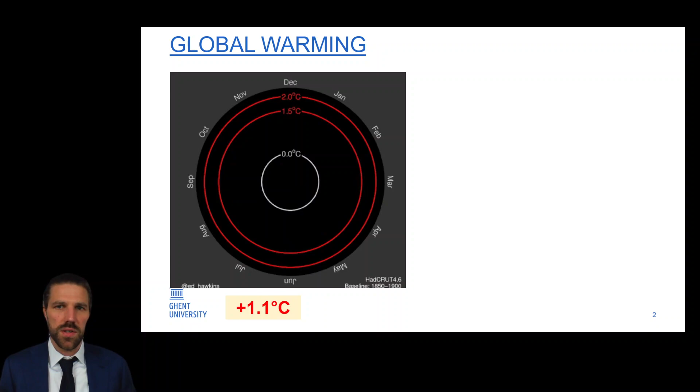This has huge implications for us. Glaciers on land and in the Arctic are melting and disappearing, and that is causing sea levels to rise. If we are not careful, it will rise by more than 1 meter by the end of the century. That could cause problems since about 40% of the world's population lives in coastal areas. In Belgium in particular, we may have more frequent extreme weather, such as the floods in Wallonia a few years back and the Ciarán storm a few weeks ago.

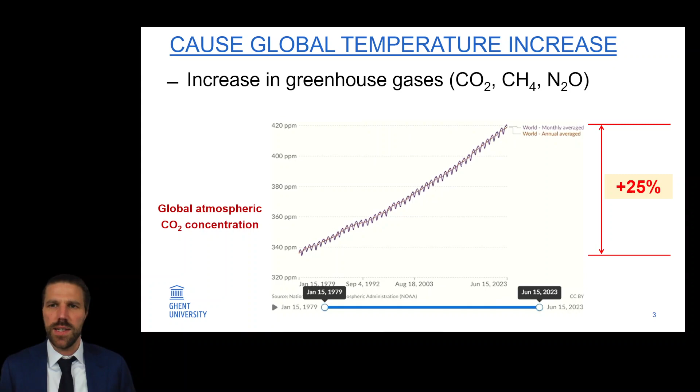The reason for the rise in temperature is greenhouse gases. On this graph you can see the rise of CO2 in our atmosphere, and it has increased by 25% in the past 40 years.

CO2 accounts for 74% of greenhouse gases, methane for a good 17%, and nitrous oxides for 6%. And then we have 2% for the so-called F-gases used in, amongst others, fire extinguishers and refrigerators. The nitrous oxides are mainly released as a result of fertilization, and methane from our livestock, landfills, or in the production and use of natural gas.

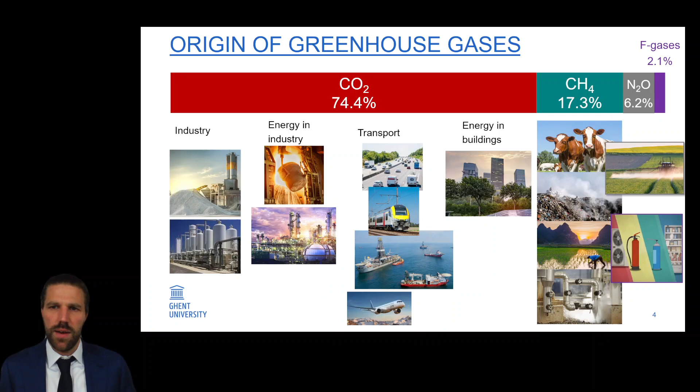CO2 is mainly released from our industry in power generation and in transport. In my doctoral research, I focused on the marine industry, and this accounts for 2 to 3% of global greenhouse gas emissions.

One question we can ask is whether regulations are needed to bring down those greenhouse gases. Currently, we emit about 50 gigatons of CO2 equivalent annually. If we continue business as usual, this will continue to rise, and by the end of the century we will have global warming of between 4 and 5 degrees Celsius.

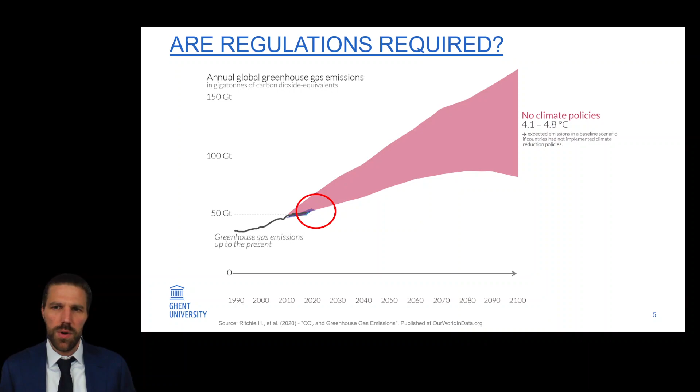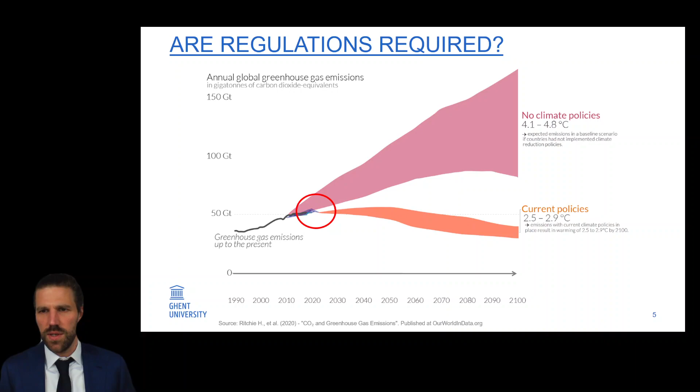Europe wants to be climate neutral by 2050, and they do that by implementing various regulations. In shipping, Europe's goal is to reduce CO2 emissions by 6% by 2030 and 80% by 2050.

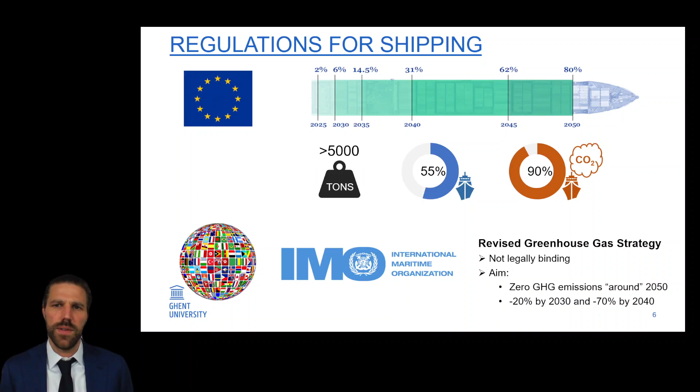That applies to ships weighing more than 5,000 tons and operating in European waters, and that's about 55% of all ships in European waters, accounting for about 90% of the ship's emissions in Europe. In international waters, the rules of the International Maritime Organization apply, and it recently updated its greenhouse gas strategy, aiming to be climate neutral by 2050, but for now it is not yet legally binding.

Now the question is, how can we implement those regulations? What technologies do we have available for that? Here it is important to note that there are two markets for those technologies: on the one hand, you have new ships being built, but on the other hand, there's also a market for retrofitting existing ships, and that's because the lifespan of ships is more than 20 years.

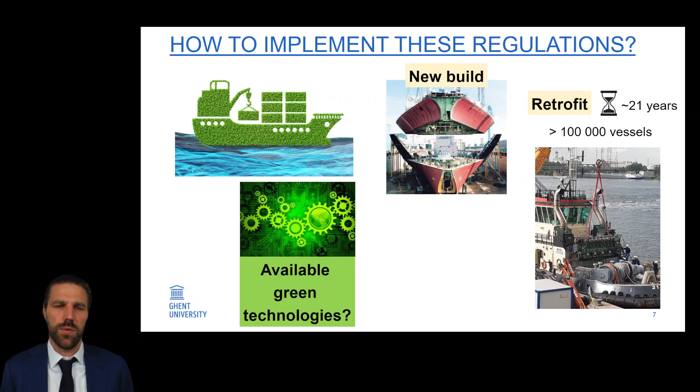Before we can look for solutions, the question is: how are ships powered today? That is mainly with petroleum products and internal combustion engines. More than 95% of ships are powered this way. Those petroleum products are typically heavy fuel oils, marine gas oil, and marine diesel oil. We want to get rid of this combustion of products.

And then when we start looking at alternatives, we need criteria to evaluate them. As a set of criteria, we can use the following: first and foremost, it is important that our solution is sustainable.

And that means that we use a sustainable source such as wind or solar energy. Second, it is important that we have a scalable solution. Recall from the previous slide that we don't have one ship, but more than 100,000 ships. If we have a scalable solution, then that also means affordable. The last criteria we have is the compactness of the solution. It has to be compact enough, as we will see later.

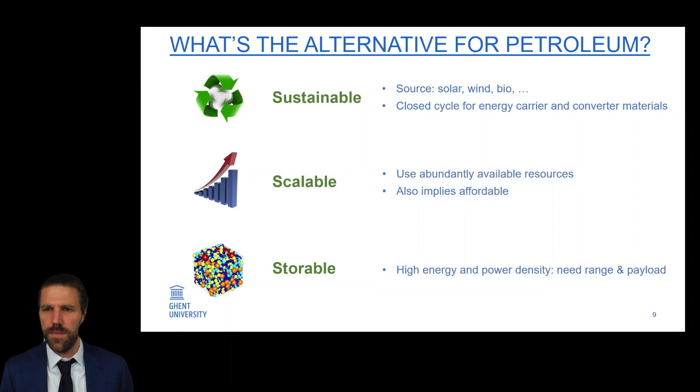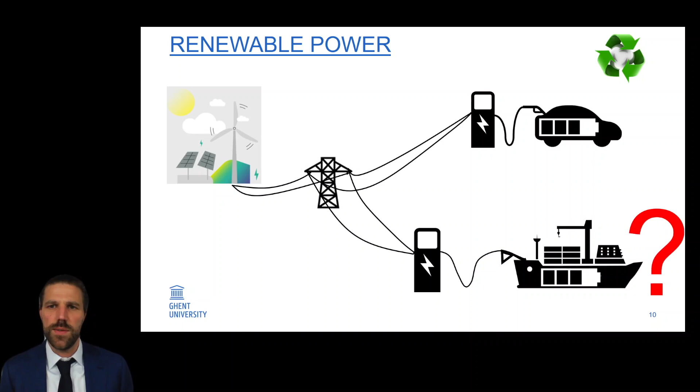If we want to use a renewable energy source, that means we want to use wind or solar, for example. And then the first question is whether we can start using ships analogously like electric cars—installing a battery electric solution in ships that we would charge directly by the grid. Whether this is feasible is best demonstrated by the next slide.

This figure shows a patrol ship weighing around 4,000 tons and about 18 megawatts of power provided by engines. If we look at the volume occupied by the diesel tanks in the ship, we see that the diesel occupies this gray volume. Now, should we want to store the same amount of energy on the ship with batteries, we need this red volume. This is obviously not feasible, and we could also question whether the ship would remain stable. So batteries are not an option, except for very short distances.

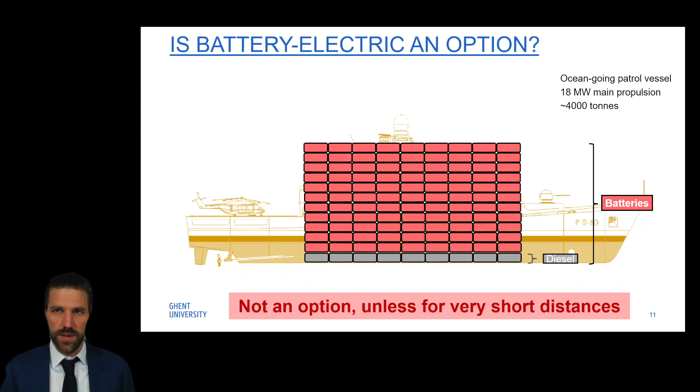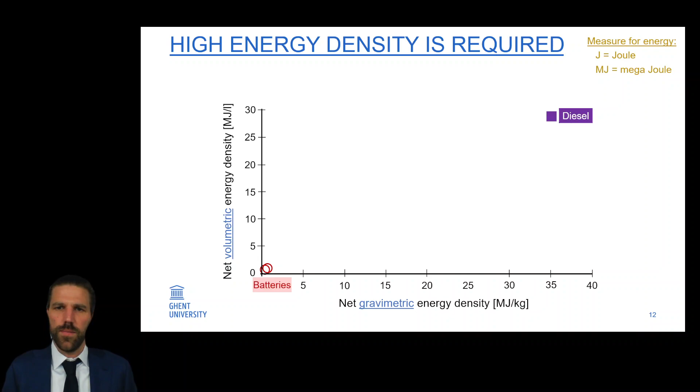Now, how come we can't use batteries? We can see that most easily on this graph. It shows on the x-axis the energy density per kilogram and on the y-axis the energy density per liter. If we put diesel here on this graph, we see that we are on the far right - diesel has a fantastic energy density. For batteries, on the other hand, we are on the far left at the bottom - batteries have a very low energy density. So for ships, we have to look at a different solution than electric, and this is why shipping is catalogued as hard to electrify.

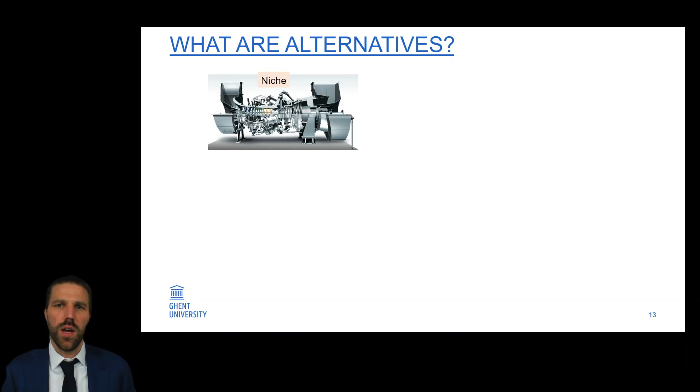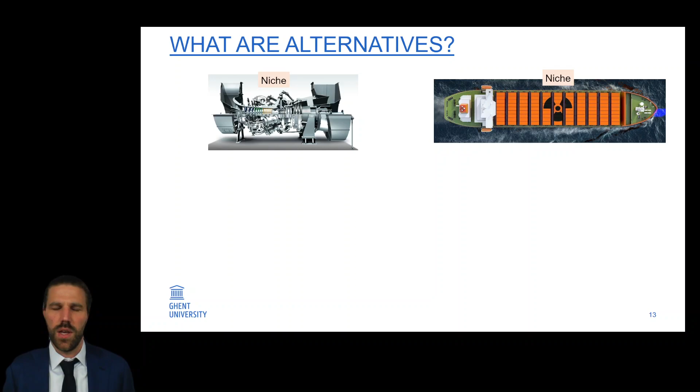But then, if we can't use battery electric, what can we use? There are 4 technologies that emerge. The first is the gas turbine - an interesting energy converter, but it has a number of drawbacks and is therefore not established in shipping, only for some niche applications. The second is using nuclear power, but nuclear power on ships is controversial and is therefore only interesting in niches such as submarines. Third, we have back our internal combustion engine, but used in a different way.

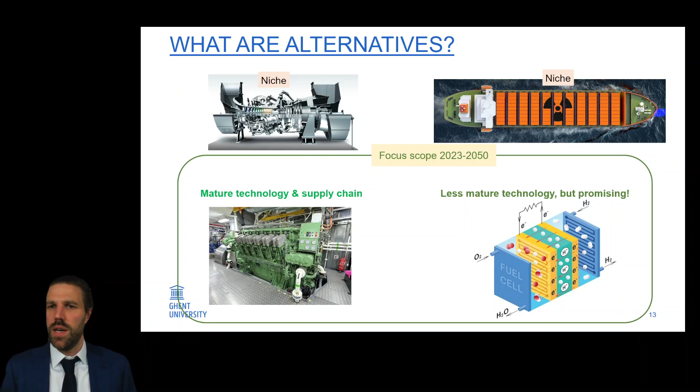This is a very mature technology that has proven itself for many years, and also its supply chain is fully established. And then we also have the fuel cell. Fuel cell technology is a very promising technology, but its maturity is yet to fully build up, as is the supply chain. The latter two have the focus for making shipping sustainable. Both technologies will play an important role, but given the maturity of the internal combustion engine, it will play a very important role in making shipping sustainable. It is also this technology that I investigated in my PhD research.

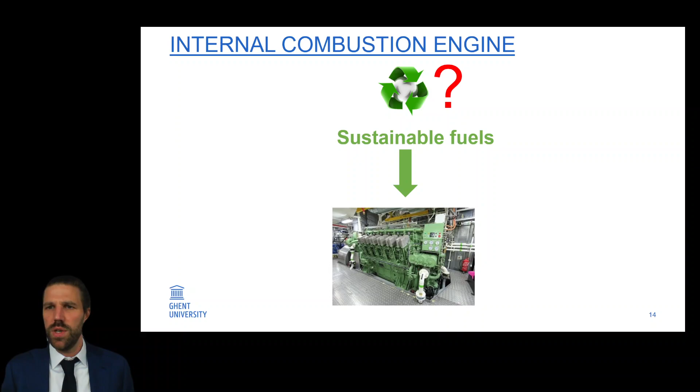But then the question is, is this technology sustainable? Because a few slides ago I mentioned that this technology, together with petroleum products, is responsible for more than 95% of CO2 emissions in shipping. And to that, the answer is yes, provided that we use sustainable fuels. So we say, keep the internal combustion engine, change the fuel. And that reasoning is similar to today's electric cars, because we also say that if it runs on electricity from coal-fired power plants, it makes no sense.

The question is now how to produce sustainable fuels. Recall from a few slides back that we could not use batteries on ships as we can with cars. But actually we want to use the same source, wind and solar power, because these are our renewable energy sources. Now we have the ability to convert this electricity into hydrogen through electrolysis. Very briefly, this is the process where we put two electrodes into water, one positive and one negative. Water, which has the chemical formula H2O, then splits into hydrogen and oxygen. And that hydrogen now contains all the energy from the wind or the sun, subject to certain conversion losses.

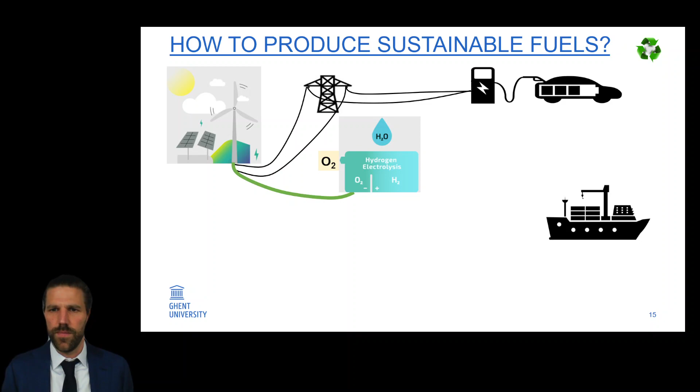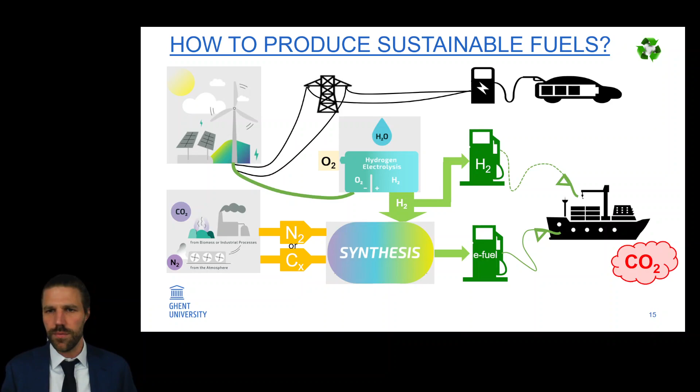We can now start using that hydrogen directly for fueling, or we can feed that hydrogen to a synthesis process. If we also add to that synthesis process carbon or nitrogen taken from the air, from flue gases or biomass, we can make any fuel we want. As a result, we then have so-called e-fuels, where the E stands for electro, because the electricity comes from wind or solar energy. And with that hydrogen or e-fuel, we can now refuel our ship. When we burn e-fuels, which contain carbon, we do release CO2, but we have first captured that CO2, so we get a closed CO2 cycle, which is not bad for our climate.

This way, we can distinguish two strategies to make the transport sector sustainable. The first is via direct electrification - we directly electrify our application, such as cars, and we directly charge them. And the second is the indirect electrification strategy, so in this, we are first going to convert the sustainable electricity into a fuel that we can then use in our application, such as ships that are difficult to electrify.

But then the question is, which renewable fuels? And then we have to start with hydrogen, because that's the first product we make from renewable energy by electrolysis. And hydrogen is a very good fuel for engines and for fuel cells. But hydrogen has a disadvantage of having a low energy density.

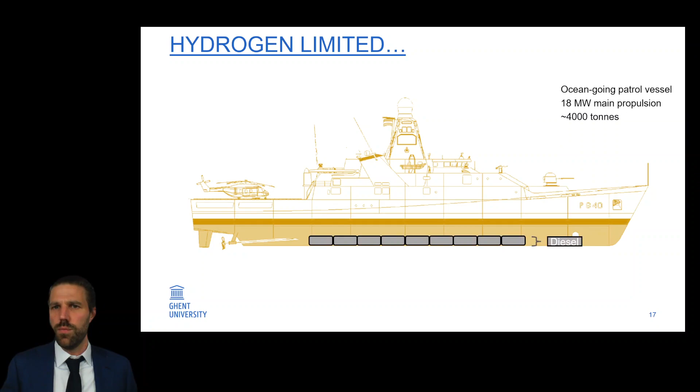If we apply this to our patrol boat from earlier, we would need this amount of tank volume with diesel, as we saw, and we should add this amount of volume to have the same energy on board with hydrogen.

So hydrogen will not be able to be used for long distances and high power, but only for small distances, as for example in this tugboat from the port of Antwerp with engines from ABC that sponsored my PhD.

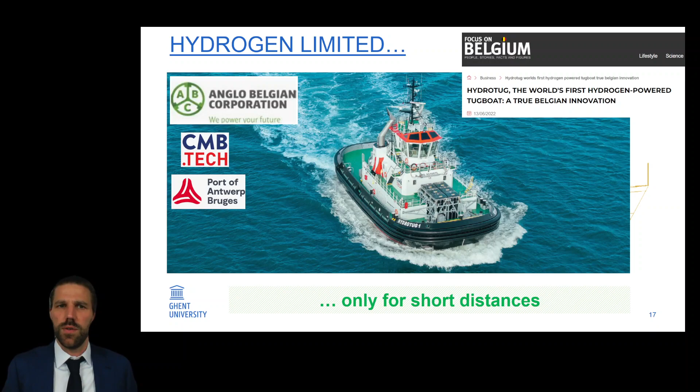In theory, we could start producing diesel. The process is known, using carbon and hydrogen to produce synthetic diesel, but diesel is a very complex molecule, which means it requires much more energy to produce compared to more simple molecules.

The simplest molecules are methane, which is gaseous at room temperature, ammonia, which is also gaseous at room temperature, and methanol, which is liquid at room temperature.

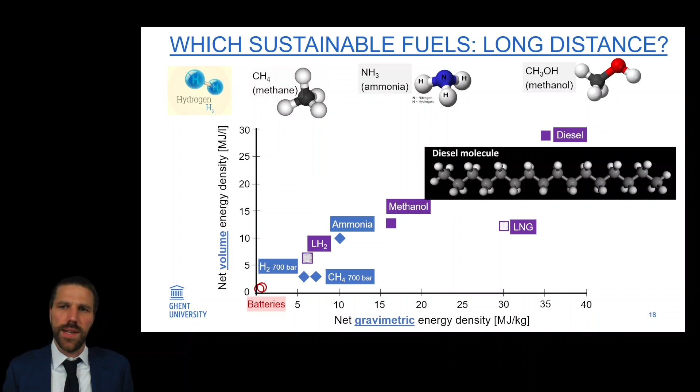One thing is clear, and that is that there is no one fuel that will replace diesel, but it will be a combination of different fuels.

In our research, apart from hydrogen, the direct result of electrolysis, we have mainly investigated methanol because methanol scores the best across the whole line.

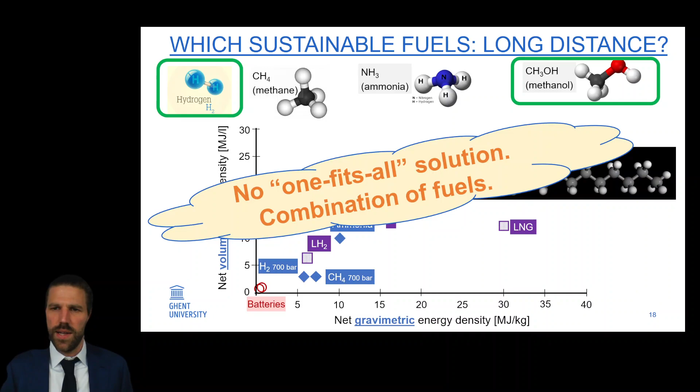It is liquid at room temperature, which makes life tremendously easy. It is biodegradable and it is a brilliant engine fuel. That is why methanol is going to be a very important fuel in shipping.

This is also confirmed in practice. The past few years have seen the addition of many ships running on methanol.

Recently, the first container ship, the Laura Maersk, was commissioned. The Stena Germanica has been running on methanol since 2015, and several Methanex ships since 2016.

In recent years, several more demonstrations have been added, as for example the vessels part of the Fast Water project led by Professor Verhelst. A pilot boat in Sweden is running on methanol, and a tugboat from Antwerp will soon be commissioned on methanol.

Now, most of these vessels are running on dual fuel engine technology. The reason these vessels run on dual fuel technology is because this technology has some very important advantages at the moment.

It is possible to run either on diesel or dual fuel with methanol or hydrogen or the sustainable fuel, and that flexibility is crucial for operators and for the supply chain right now.

If a ship arrives in a port with a dual fuel engine and it cannot refuel with methanol, for example, it can still continue its journey on diesel by tanking diesel. That way, the ship's risk of running out of fuel is avoided, and that also allows the fuel infrastructure to scale up.

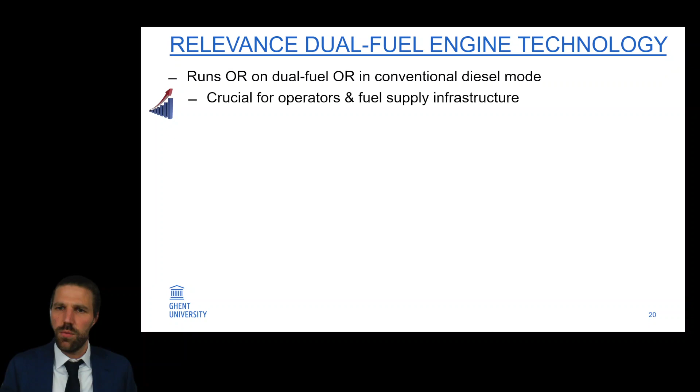And in that evolution, dual fuel technology will play a crucial role. It is on this technology that I have been researching for the past years.

Right now, as we just saw, we already have the first ships sailing with dual fuel engines on methanol, also on hydrogen. Those engines can be categorized as the first generation of dual fuel engines. The aim of my PhD research was to generate new knowledge in the development towards second generation dual fuel engines.

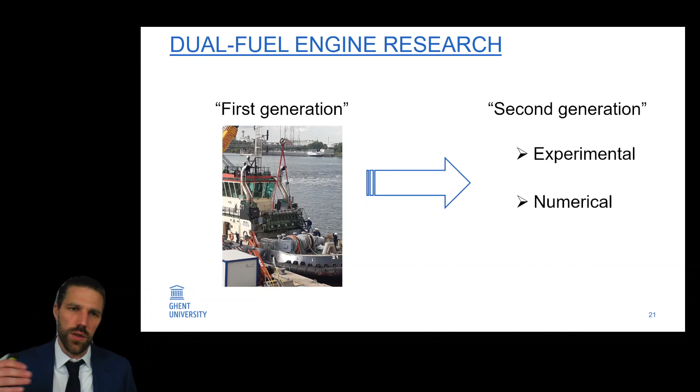I did that in two ways: by making experimental measurements, and by creating a numerical model. But before I can go deeper into my research, I need to do a recap of how engines work, because that will be crucial to understanding what exactly I have been researching.

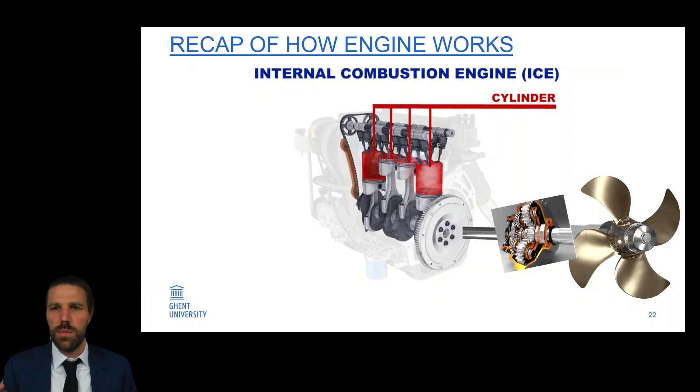Now, if we zoom into the cylinder, we can distinguish in general 2 types of concepts. The first is the diesel compression ignition principle.

Air is drawn into the cylinder, which is compressed. At the end of the compression, when there are high temperatures and pressures, diesel is injected. At these high temperatures and pressures, diesel self-ignites, and then we get the combustion of diesel, releasing its energy.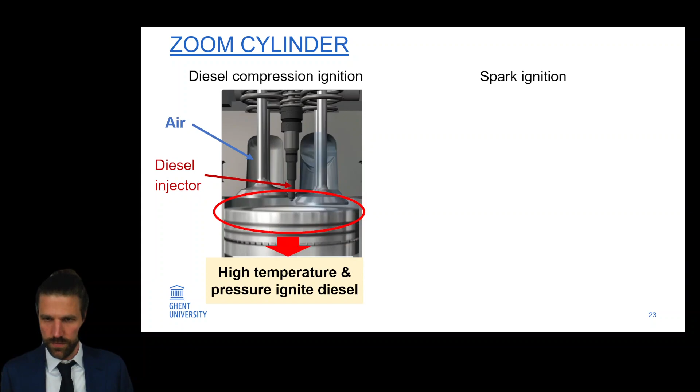The second concept is the spark ignition principle. This is typically applied to gasoline engines. The fuel, gasoline, is injected together with the air and is sucked into the engine. It is then compressed, and at the end of the compression we have a spark that ignites the mixture.

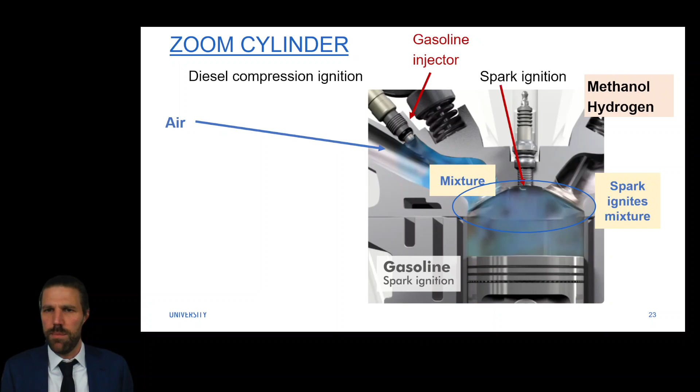This principle is also ideal for fuels such as methanol and hydrogen because they have a high octane rating. If we were to use hydrogen and methanol like diesel, that would not work. Those fuels, just like gasoline, would not ignite after being injected. This is because methanol and hydrogen have a very low cetane rating, and that is essential for fuel used in diesel type engines.

Now, if we want to introduce methanol and hydrogen into shipping and still retain diesel operation, we have to go for a combination of these two principles. That combination is called the dual fuel combustion principle.

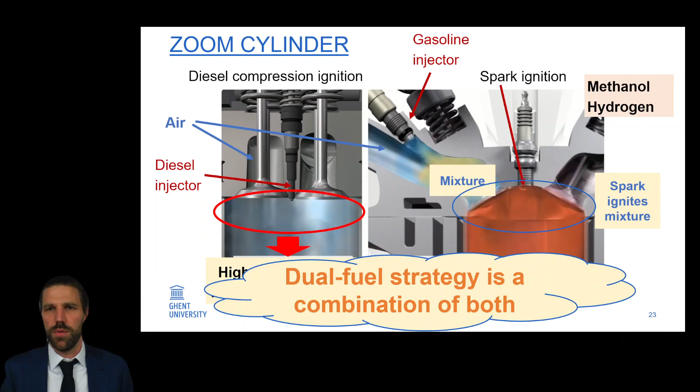In this animation, we see the dual fuel principle in action. Methanol or hydrogen is injected just before the intake valve, and diesel is injected into the cylinder. The mixture of air and methanol, or air and hydrogen, is drawn into the cylinder and compressed. At the end of the compression, diesel is injected, which then ignites the mixture. So the diesel actually serves as the ignition source here.

We want to replace as much diesel as possible with methanol or hydrogen, but we still have to keep a portion of the diesel to ignite the mixture.

This dual fuel solution is particularly interesting because methanol and hydrogen can be injected at low pressure. That makes it an easy solution for new build ships and especially for retrofits of existing ships, and also makes it the most cost-effective solution among the various dual fuel methods.

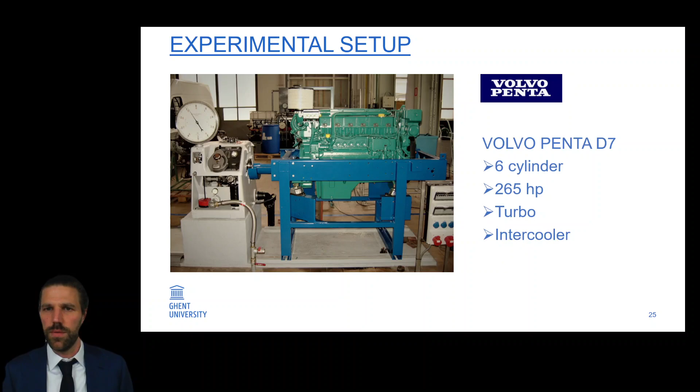Now, to do experimental research, we need an experimental setup. When I moved from Engie to Ghent University in 2017, my first task was to work with our technician and my professor to convert this engine to run on methanol in dual fuel. To do that, we installed several sensors on this engine.

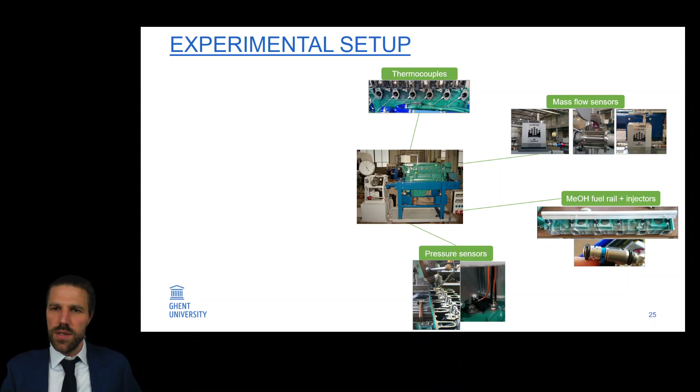For us, crucial parameters to measure are pressure, temperature, and mass flow rate. If we know these quantities, we can already calculate and understand a lot of what is happening in the engine. In addition to these sensors, we installed a methanol fuel rail, injectors, a methanol container and a fuel supply system, meaning a pump, a data acquisition system, and an engine control unit.

Soon there will be a reception going on in our lab just next to the engine, so the people staying for the reception can take a look if they want to see all this in real life.

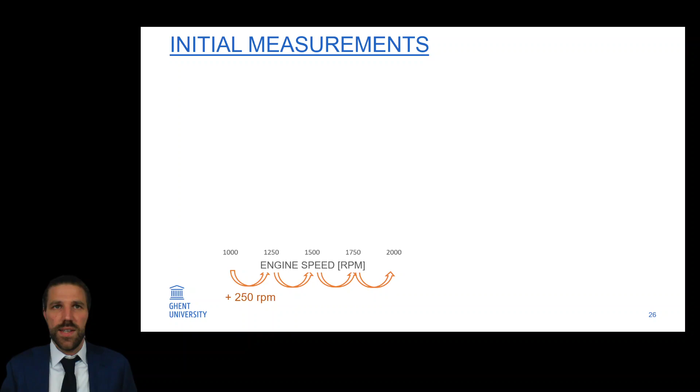In each of these points, we started from diesel operation and then started increasing the methanol amount. Every time you increase the methanol amount, you have to factor in that you decrease the diesel amount, because ultimately we want to compare pure diesel operation with dual fuel operation, and we want only one parameter to change. We don't want to change the other parameters like the speed and torque delivered by the engine, because that way we can make good comparisons between diesel-only operation and dual fuel operation.

In each case, we went until we couldn't replace extra diesel with methanol. This had several physical reasons, but it is also important to keep in mind that we can never replace all the diesel, because then we would not have an ignition source anymore.

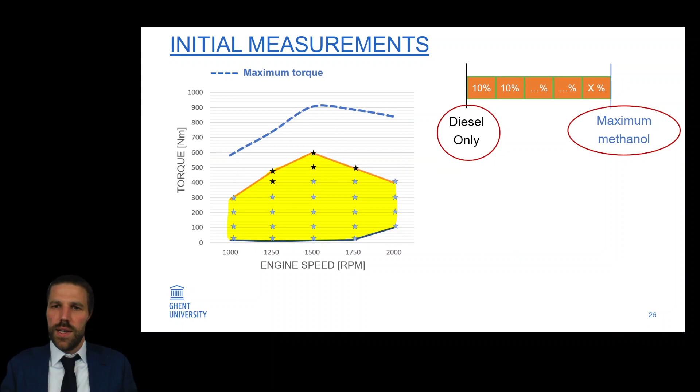In each of these points, we examine different parameters, a few important ones being the methanol energy fraction, the efficiency, and the emissions of NO and soot.

Now let's look at what these parameters are to understand what follows. The methanol energy fraction represents how much methanol energy is in the cylinder compared to the total energy of diesel and methanol. For example, if this factor is 60%, then 60% of the energy comes from methanol and 40% from diesel.

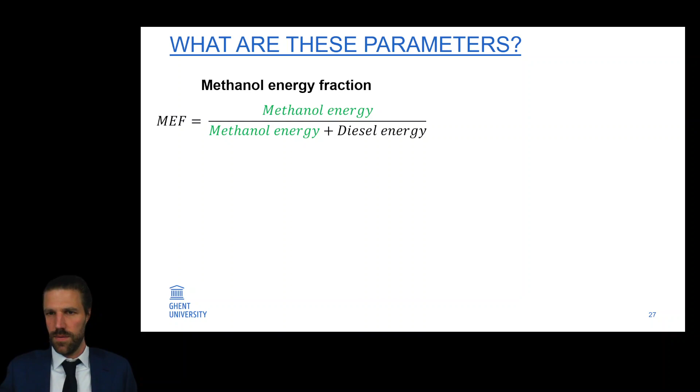We also have the diesel substitution ratio, which is similar but only reflects how much less diesel we use, and says nothing about the amount of methanol used. Typically, these two parameters are about equal, with only a few percentage points of difference.

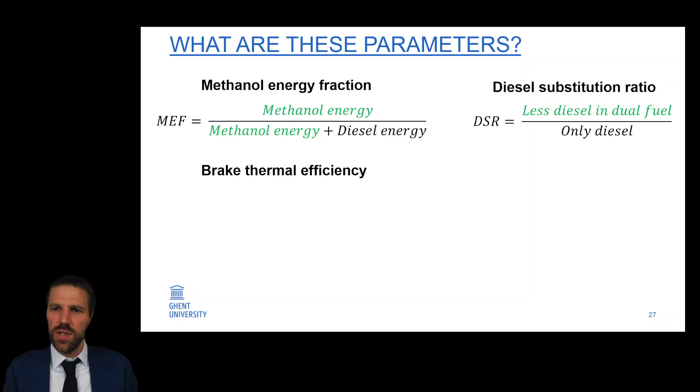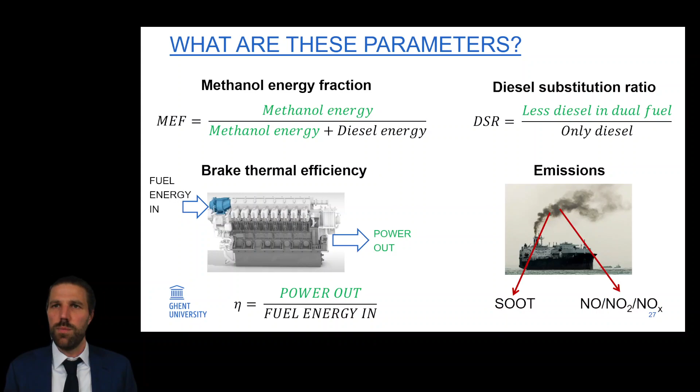To calculate efficiency, we look at the total fuel energy fed into the engine and compare it with the measured power output at the shaft. Dividing the measured power by the energy input gives the engine's efficiency. Emissions were measured in the exhaust, typically soot and nitrogen oxides.

For our first measurement campaign, we measured methanol energy fractions between 25 and 70%, corresponding to a diesel replacement of 17 to 67%. We measured higher efficiency in some points than in diesel operation, up to 12% higher. Typically, efficiencies were lower at low load than diesel operation, and higher at high load.

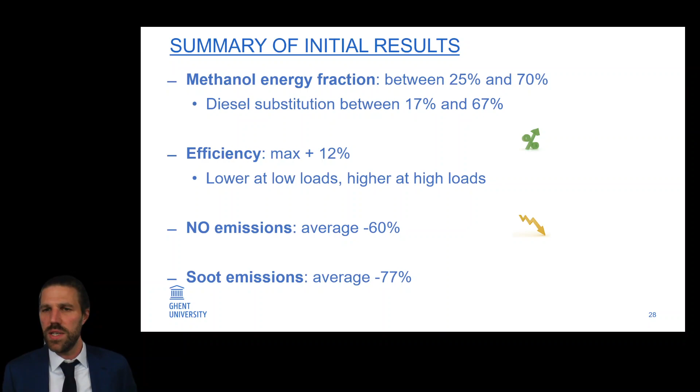NOx emissions went down tremendously, with average decreases of about 60% over the full range. Soot emissions also went down tremendously, by about 77% on average over the entire area measured. We presented these results at CIMAC in 2019.

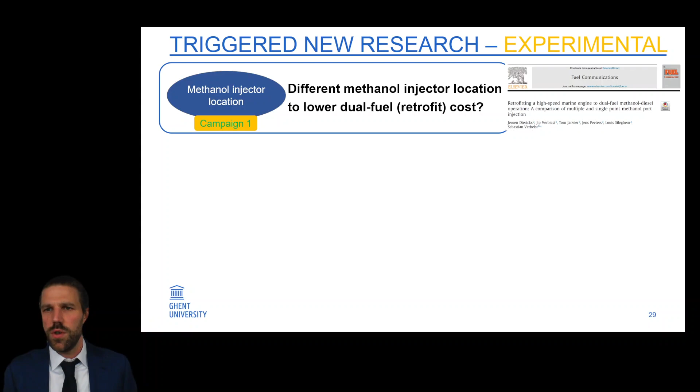This triggered several new research questions. The first was whether we could change the methanol injector location to reduce the cost of this solution. That research was published in Fuel Communications.

In a second campaign, we investigated whether it's beneficial to have water in methanol, which could be interesting to reduce methanol production costs. Those results were published in Fuel.

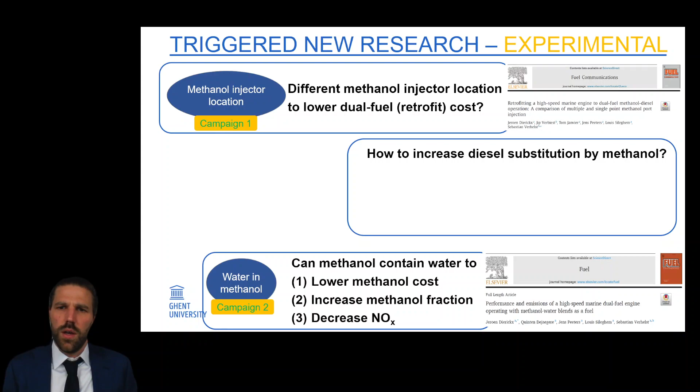Third, we investigated how to replace more diesel with methanol, because the larger this percentage, the more CO2 emissions we can reduce. To investigate this, we played with three engine parameters: intake air temperature and pressure, and exhaust gas recirculation. We presented these results at the SAE Congress in Capri this summer.

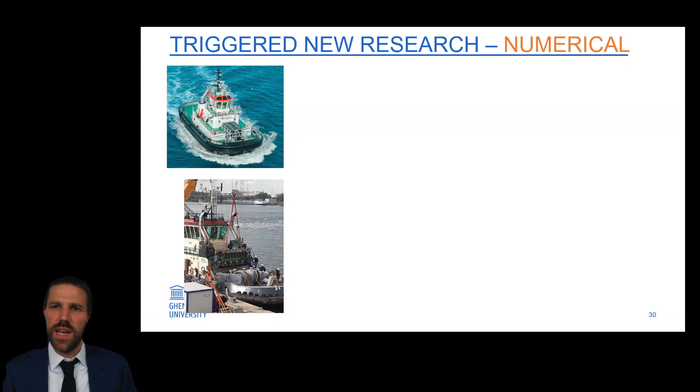Besides experimental research, ABC was also interested in numerical research. In 2018, they started developing dual-fuel hydrogen and methanol engines installed in two tugs. You should know that if you do experiments on the engines in these vessels, you will soon consume 50 liters of fuel per hour per cylinder.

In these vessels there are typically 2 megawatt V12 engines, meaning we consume about 600 liters per hour per engine. At €1 per liter, that's a cost of more than €600 per hour. Measurement campaigns easily take several days to weeks, so the fuel cost alone adds up enormously.

That's why ABC asked us to develop a dual fuel combustion model. We did this, but had to develop a number of new things, including a new diesel ignition delay model, because diesel is now injected into a mixture of fuel and air, not only air.

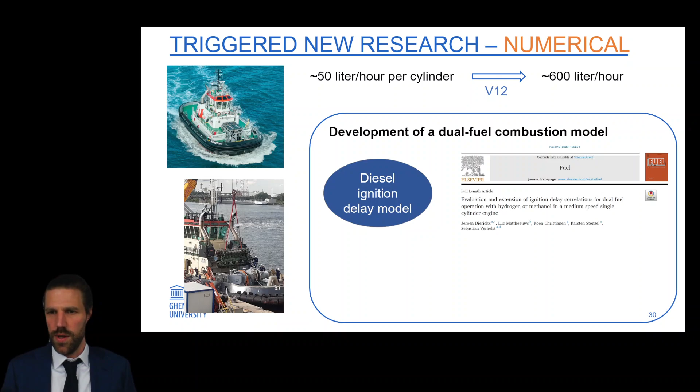The results of this were published in Fuel earlier this year. We then implemented all the new submodels in a fully integrated dual fuel model developed in GT Power, and these results were also presented at the SAE Congress in Capri this summer.

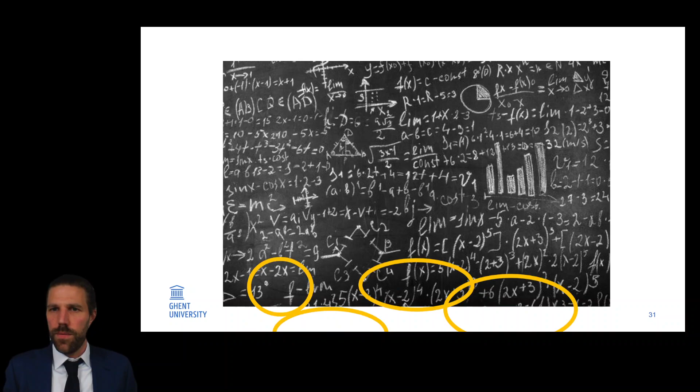I cannot go into detail on all the results of my research, so I have extracted some results to present to you. For example, to increase the diesel substitution by methanol, we investigated the following.

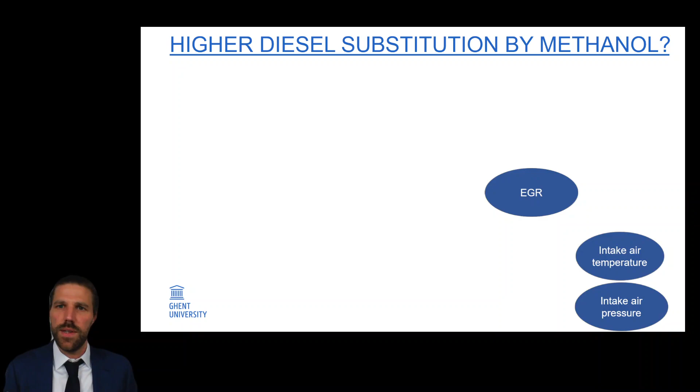To see how we could replace more diesel, we played with a number of parameters. The first two were intake air pressure and temperature, because changing these also changes the temperature and pressure in the cylinder, which in turn affect the combustion of methanol and diesel.

You could compare it to an exercise test of an athlete on a bicycle in a certain room: if we increase the temperature and keep pressure constant, would the athlete's performance improve or not? Similarly, we investigated the effect of intake temperature and pressure on the amount of diesel we could replace with methanol.

This amount is limited by a number of phenomena in the cylinder, plus we always have to maintain a certain amount of diesel since it's the ignition source. We found that reducing pressure did not give a positive result, but higher temperatures achieved a 5 to 10% higher diesel substitution.

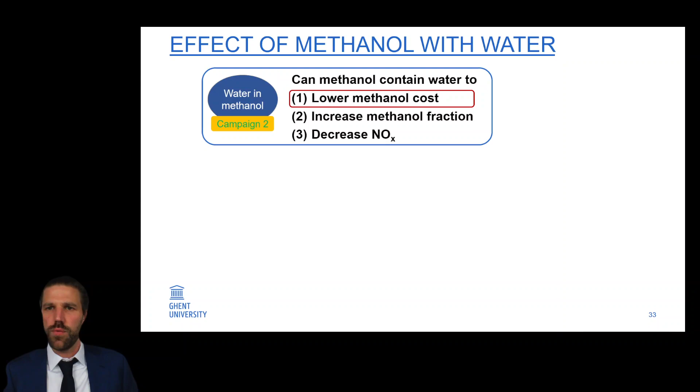Now, in one of the last steps of the production process, the methanol, which has a purity of 90%, is further distilled until the remaining 10% water is also purified out, so that we get very pure methanol. The question was whether we could skip that last production step, because then we could reduce the cost.

We saw that from a diesel substitution point of view, that was not beneficial. With every increase of about 10% in the methanol blend, we saw the substitution of diesel with methanol going backwards by 10%. For NOx formation, it was beneficial. We saw up to 30% decrease in NOx when we added up to 50% water, compared with pure dual fuel operation.

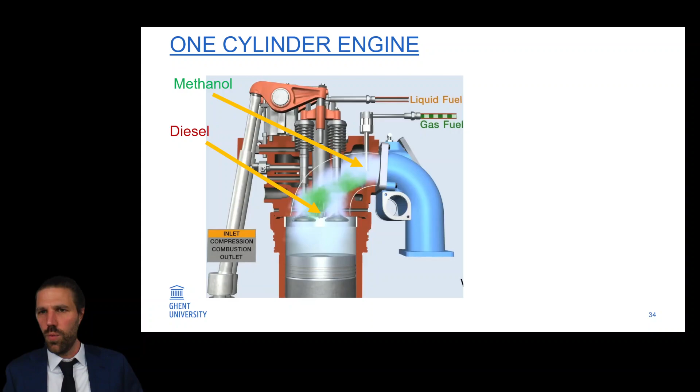Then in one of our first experimental campaigns, we tested the methanol injector position. Here we have the one cylinder animation with the methanol injection and the diesel injection. Now in an engine we have multiple cylinders. In the Volvo Penta engine we have 6 cylinders in total.

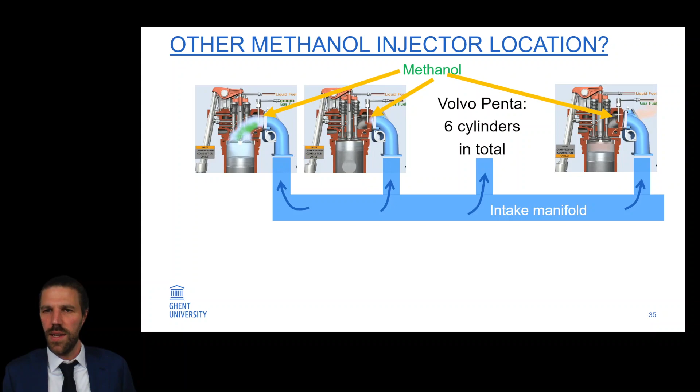That means we have the same process taking place 6 times, with the methanol injector just before the intake valves each time and the diesel injector in the cylinder each time. The air comes from one big intake manifold, entering via the intercooler and turbo from the atmosphere. That intercooler is there to cool the air because after compression in the turbo, the air is seriously heated.

Now, our question was whether we could limit the methanol injection location to one location just after the turbo. That way, we could place methanol injectors in a more accessible location than just before the intake valves.

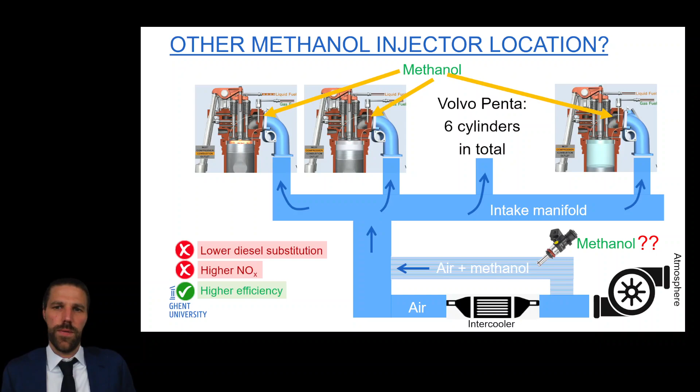When we did our comparison, we saw that it was not beneficial for the substitution of diesel with methanol. For NOx, it was not favorable either. Only for efficiency was it favorable, because of the higher temperatures in the cylinder.

Now, to obtain all the previous results, we conducted experimental research. This means we first had to build a test setup. Then we could start taking measurements on it, and then we had to add new systems to that engine to make new measurements possible.

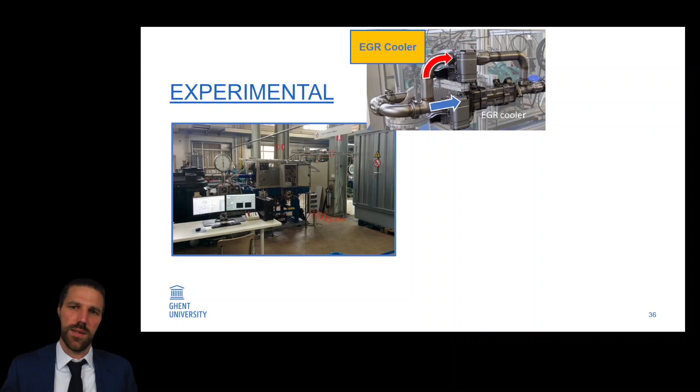On the one hand, a heat exchanger and a wastegate for controlling air temperature and pressure, an exhaust gas recirculation system to send exhaust gases back to the intake, and an addition of injectors in the intake to test the different methanol injector positions.

Now the question is whether it is also possible, instead of making measurements, to make predictions through calculations of what the engine would do. In this way, as mentioned earlier, we could save fuel costs but also time, because such measurements take a lot of time. ABC was particularly interested in this, to develop a dual fuel combustion model for their engines.

In my PhD, I therefore focused on the development of a dual fuel model, initially for the geometry of the DZ engine family. But my model can also be used for other types of engines with some adjustments.

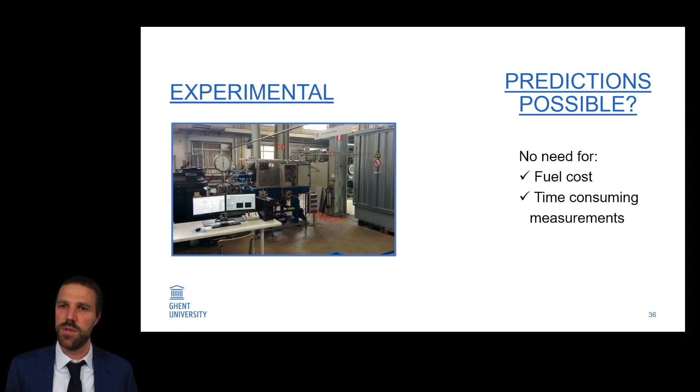We built that model in GTPower, a simulation software used by many engine manufacturers. To do that, we need to make all the components of the engine digital, starting with the intake manifold and the methanol injector. Next, we have the intake valves. Then we have the cylinder connected to the crankshaft.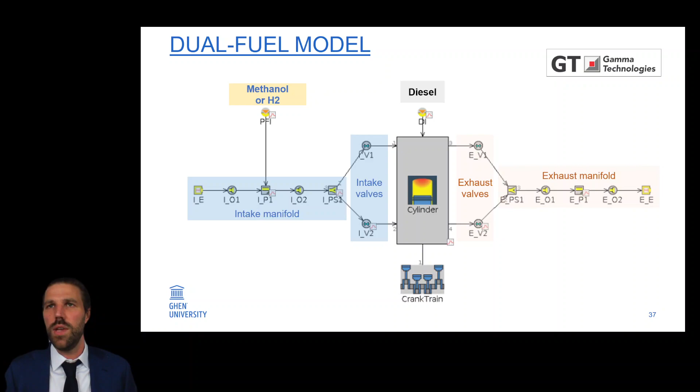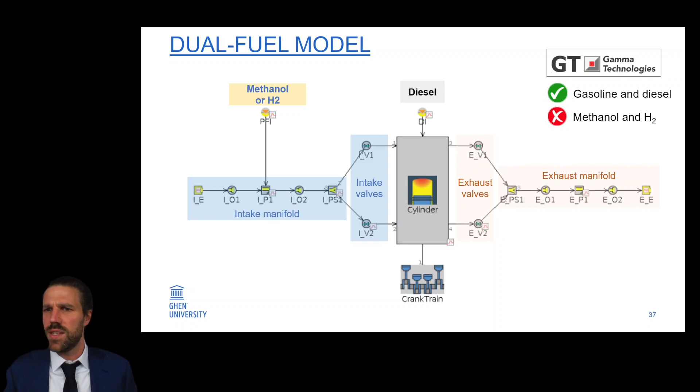In the cylinder, we have a diesel injector, and then after combustion, the exhaust gases go through the exhaust valves to the exhaust collector. Now, GTPower is a strong software for established fuels such as gasoline and diesel, but not for new sustainable fuels such as methanol and hydrogen. So that is why we had to create several new submodels to get good predictions.

One of those new submodels is the diesel ignition delay model. Here you had the animation of the one-cylinder dual fuel engine. Because diesel is injected in a mixture of air and methanol or air and hydrogen, this is different from how the injection occurs in a traditional diesel engine.

In a conventional diesel engine, diesel is simply injected into air, and that has an impact on the ignition delay. What is the diesel ignition delay? When diesel is injected as a liquid, it must first transition from the liquid phase to the vapor phase and then mix with air to ignite. The time between diesel injection and diesel ignition is called the ignition delay. This is very short, typically on the order of less than a millisecond.

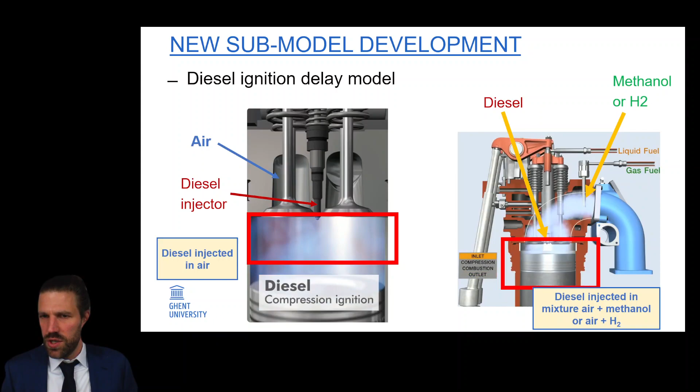If we inject diesel into air, we are injecting it into a different environment than if we inject it into a mixture of methanol and air, or hydrogen and air. And we saw, especially with the presence of methanol, a much larger delay in dual fuel operation. That longer delay in diesel ignition could not be captured with the models developed for diesel engines. Therefore, we had the need for a new ignition delay model, and we developed that.

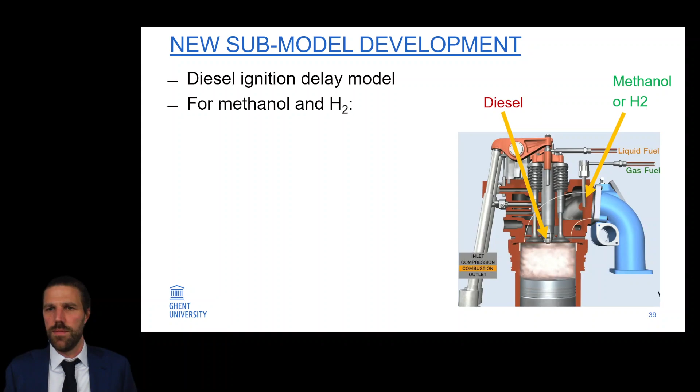In addition to a new submodel for diesel ignition delay, I also had to create new data for the laminar burning velocity. The laminar flame speed is the speed at which the flame front moves in the cylinder. You can compare it to an explosion, for example a car exploding. When it explodes, it does that at a certain speed, and it is that speed that is important when predicting the pressure buildup of such an explosion. That speed varies depending on the pressure and temperature in the cylinder, so we need a lot of such data. Now, if turbulence is also present, then that creates an additional burning velocity.

We replaced the turbulent burning velocity model in GT-Power with a more accurate one.

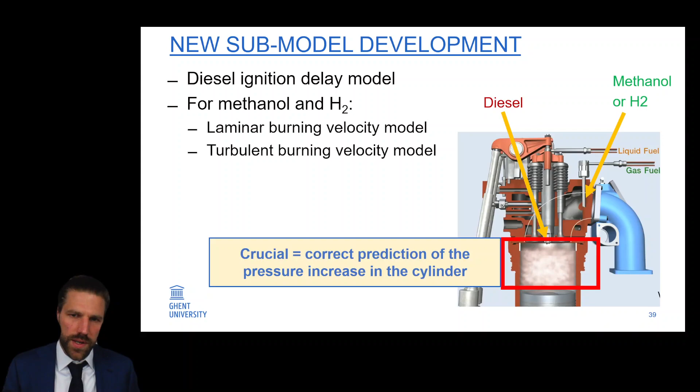Now, all these models together are crucial because they indicate when the diesel starts combustion and also how quickly the methanol or hydrogen will burn. That speed determines the pressure buildup in the cylinder and thus the force delivered to our rotating crankshaft, which is then transferred to our propeller. So an accurate representation of all these physical phenomena is crucial to have a dual fuel combustion model.

As a result, we obtained the following pressures, where the solid lines are measurements and the dashed lines are predictions. The blue curve is with 25% methanol energy, and the green curve is with 50% methanol energy. That means that at one operating point we have 25% of the energy coming from methanol and 75% coming from diesel in the cylinder before combustion, and at the other operating point it's 50-50.

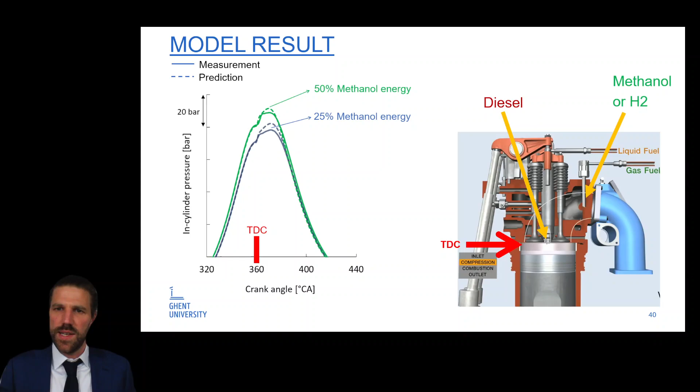The red indication is at top dead center, when the volume in the cylinder is minimal, so when the piston is at the top. We see that as we approach this point, the pressure builds up, and after this, combustion takes place, so we have an even stronger pressure buildup here, despite our piston already moving downwards. Our predictions, the dashed lines, fall within 2 to 3% of our measurements, which is within a range of 5%, typically a threshold to say that we have good predictions.

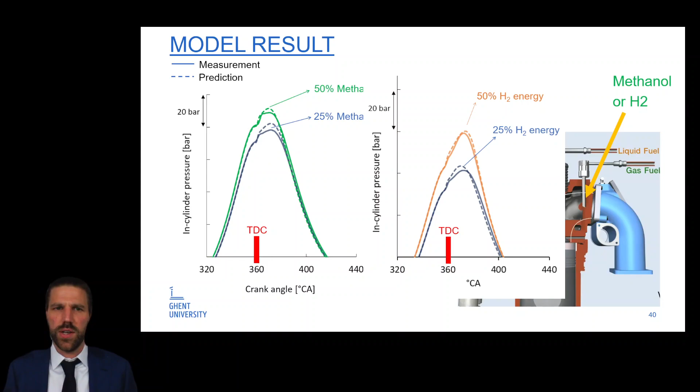Also for hydrogen, we see the same good agreement with the curves, again at 25 and 50% hydrogen energy fraction. And these results bring me straight to the end of my presentation.

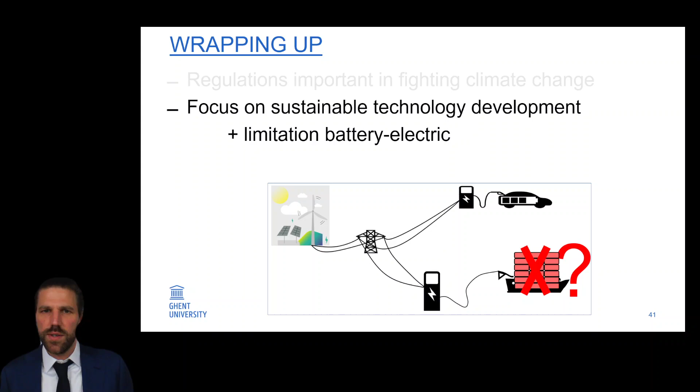We have seen in this presentation how important it is to have regulations because they give us the objectives to work towards. We also saw how important sustainable technology development is in that story due to the limitations of battery electric applications. We saw the importance of the combustion engine with sustainable fuels, and more specifically how the strategy falls under the indirect electrification strategy. Finally, we saw the importance of dual fuel technology in the transition of shipping to sustainable engines. We need flexibility while the fuel infrastructure can build up, and that is delivered by the dual fuel technology.

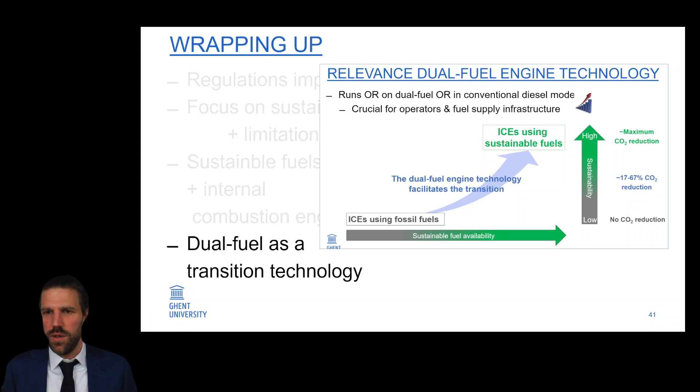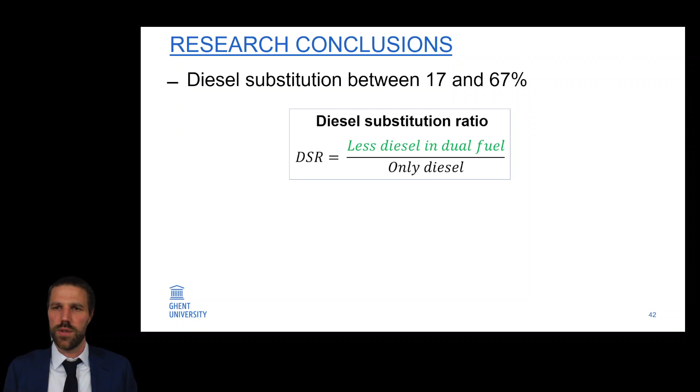Then we saw that we could replace up to 70% of diesel with methanol without too many fundamental adjustments to our engine, just figuratively speaking, by adding methanol injectors in the intake and controlling these injectors. We achieved high efficiencies and low NOx and soot emissions.

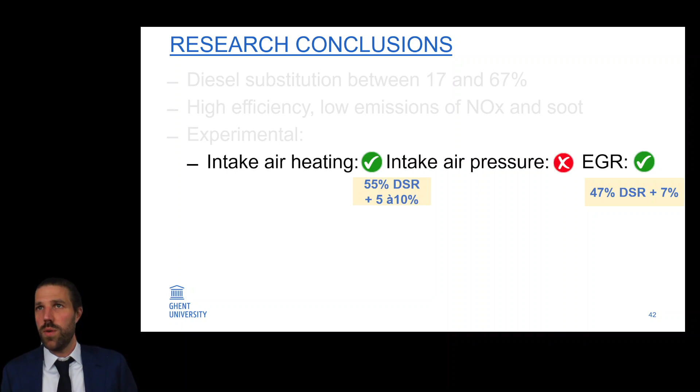With our experimental investigations, we saw the following things: when we used increased intake air temperatures, we could increase the diesel substitution, and also when we used EGR. The best methanol injector location is just before the intake valves. And methanol in water is allowed, but we have a trade-off: the more water we allow in methanol, the less diesel we can replace with methanol, and we want this fraction to be as high as possible.

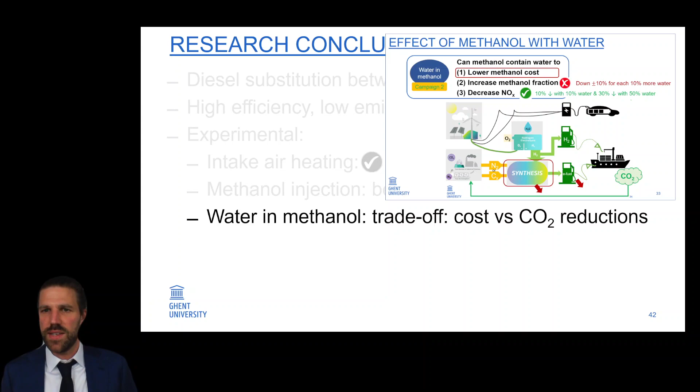The numerical results yielded some interesting new submodels, such as the diesel ignition delay model and the laminar and turbulent burning velocity model. We then implemented these new submodels into a dual fuel combustion model for an ABC engine and tested it, and that gave us pressure predictions within acceptable limits.